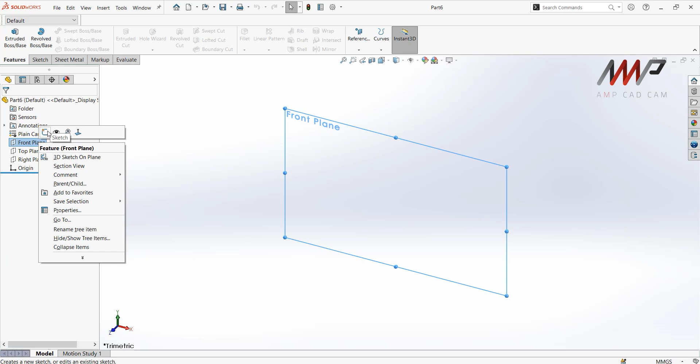Selecting our custom template that we created earlier, sketching on the front plane. I will select a center point arc, the first option from the arc sketch entity. My first click will be on the origin for the center point of this arc. I will click to the left for the first endpoint and to the right over there. And again, a second arc over there.

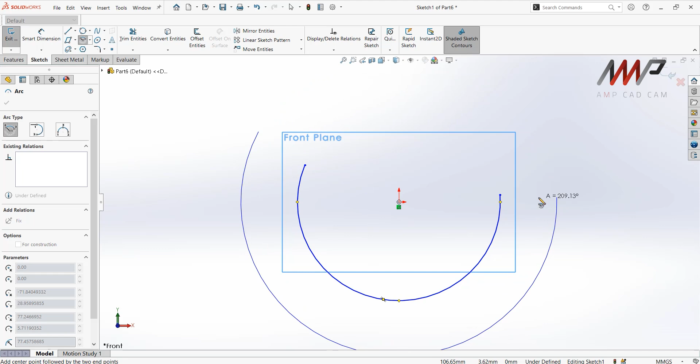Don't worry about where the endpoints are right now, as we add in our dimensions they will pull themselves into the correct position. From here, using right click on my mouse and swiping to the left, selecting my line tool, I will connect this endpoint to a vertical line upwards, horizontal line to the left, making use of these dotted lines to make sure I'm in line with the end point of this arc over here.

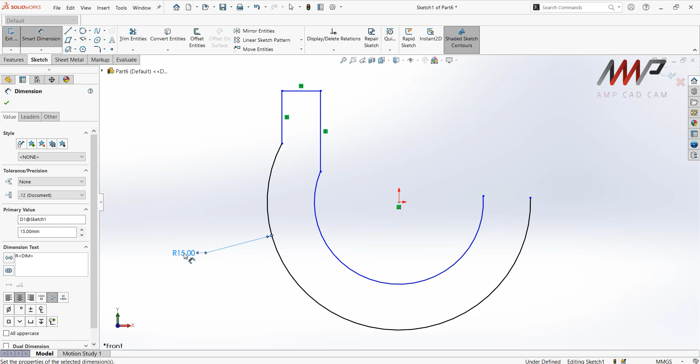So the largest dimension over here is this diameter 30 for the outer arc. Although it's listed as a diameter, in our actual sketch we need to insert it as a radius because of the nature of this arc. Selecting this arc, that radius will then be 15. Remember, your first dimension on your sketch scales the rest of the sketch, which is why I added the largest one first.

Thereafter, I can add this 6 millimeter on that length over there. This was a radius of 8 for a diameter 16.

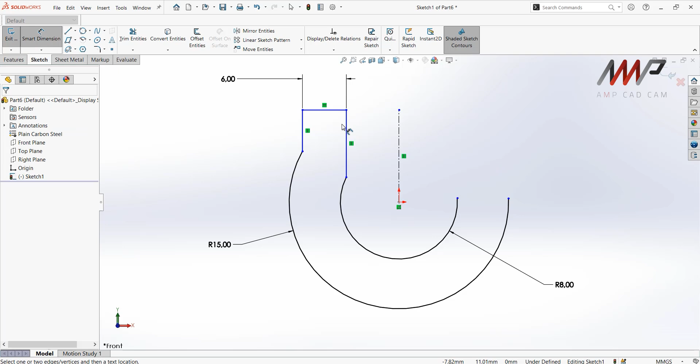From here, I am going to add in a center line. Right-clicking and swiping to the left for my line tool, ticking the box that says for construction because I'd like a center line. Now from the origin, I will draw a vertical line upwards. I would like to dimension between this vertical line over here and the center point, the center line.

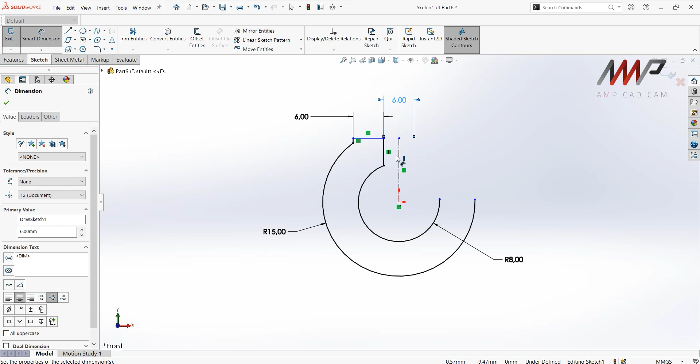You'll see in our instructions there is a diameter 6 gap across the center line over there, so that's what we're doing now. Moving my mouse past the center line so I get a double dimension, that is 6 millimeters there as well. Then the height of this line from the origin is this dimension over here, 12 plus 3, all the way to the top, so that is 15. From there to there is 15.

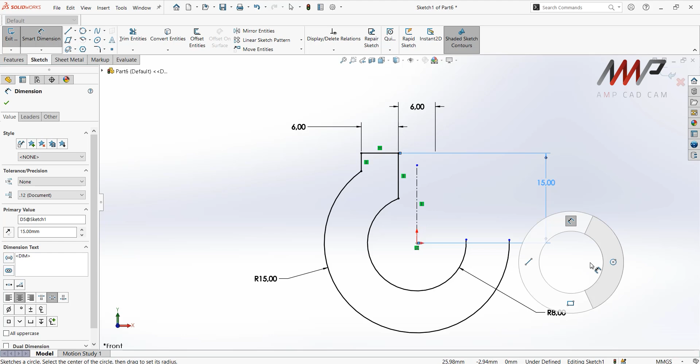Okay, we're almost there. Now I'm going to right click and swipe to the right for my circle tool and insert this over here. That was a diameter of 4 with a height from the origin of 12 and a center distance across the center line of 12, again making use of that center line to give us a double dimension across.

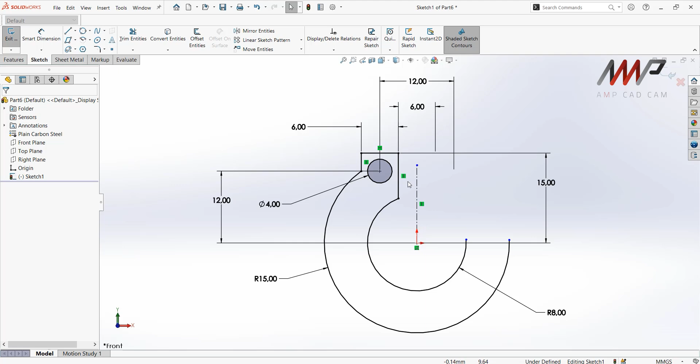Now we can go ahead and select the entities that we want to copy, the circle and these 3 lines, and mirror that across the center line. You can click and control select each of them individually, or left click and swipe towards your left, and you'll see this green box appear. All the entities that are partially or completely within this box will be selected. So I've got the center line, those 3 straight lines and the circle.

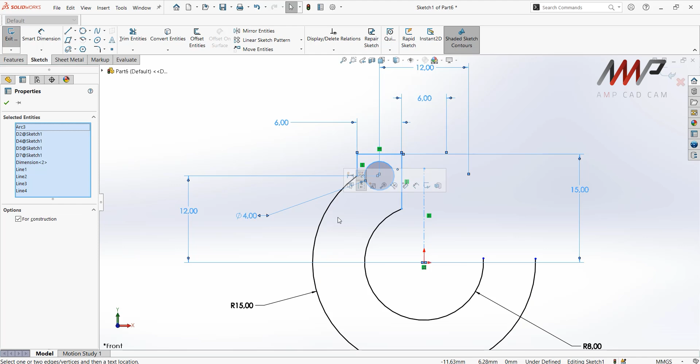I also have this arc over here which I don't want to include. I can simply unselect it by holding control and clicking on the arc to unselect it, so only the blue entities are included. I've included the center line over there, so clicking on mirror entities will automatically produce the result I want, which is the copy of the 3 straight lines and the circle on the other side.

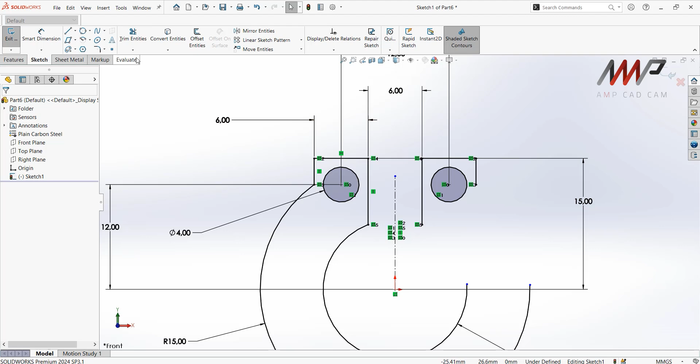From here, to close these arcs over here, I will under trim entities, expand that menu and click on extend entities. Click on one arc to extend it and click on the second arc to extend that too. Now our shape is complete, our sketch is complete, and we can do our boss extrude. Clicking on the features tab, going to extruded boss/base, this was a thickness of 1 millimeter over here.

So let's include that here, 1 millimeter, and that is a blind extrude. We can see the preview and that looks good.

The last thing we need to do is add the fillets. The fillets are radius 1 in 8 corners. So let's go and add those in as well, on the features tab, going to fillet.

We want a radius of 1 millimeter, and we can go and select those edges now. So I'm zooming in slightly so that I can see well enough, and I can select those edges. Even if you can't see the edge directly, you can actually click through a surface and it will highlight orange.

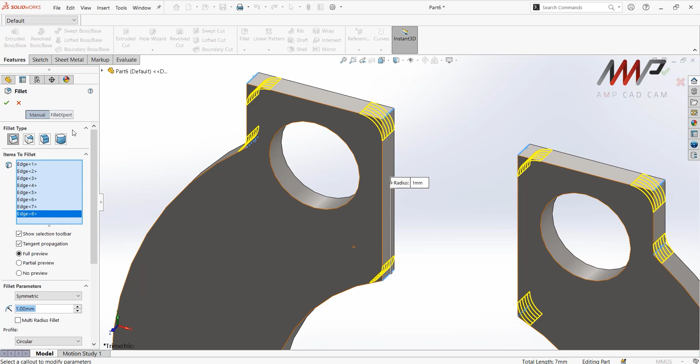So that's 4 so far. That is 5, 6, 7, and 8. And there we have it. I can click OK on that, and the first configuration is done.

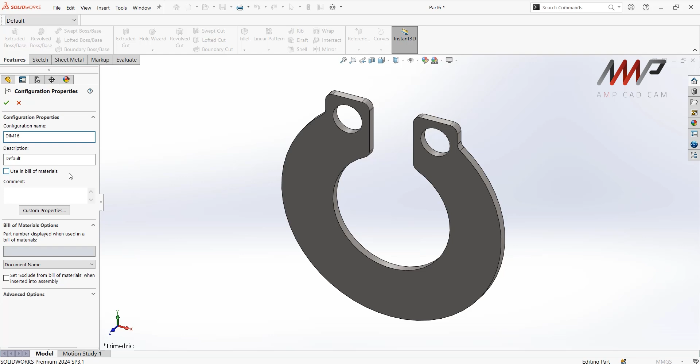Now what I will do is, in the configuration manager, clicking on that default, I can copy and paste to create a new configuration. This one that we have just made, I will rename it. This I will call dim 16 because the inner diameter of this is 16, and the copy that we are going to edit now to make it smaller is going to be dim 8 because the inner diameter is a diameter of 8.

Okay, so popping back to the feature tree, I can see my fillet and everything is over here. I'm actually first going to edit the fillet and change this dimension for this configuration only, and I'd just like to halve this.

So I know that half of 1 is 0.5, but if it was a bit more of a complicated number, I can actually type in this dimension box over here, a slash for divide and a number 2, in other words, divide by 2. When I press enter, it will calculate it for me and include it there.

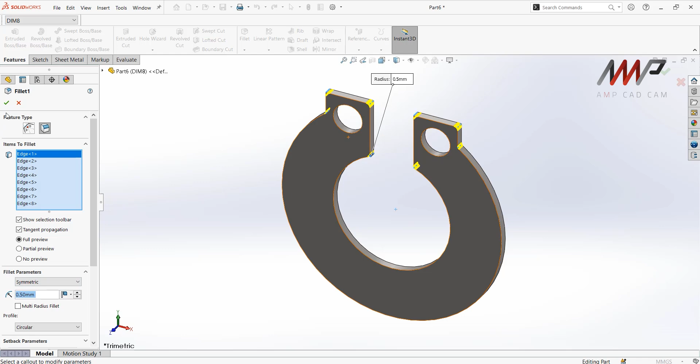Then I can click OK on that and continue to edit the rest of the sketch. So now editing the sketch of that boss extrude, remember we're on the smaller configuration.

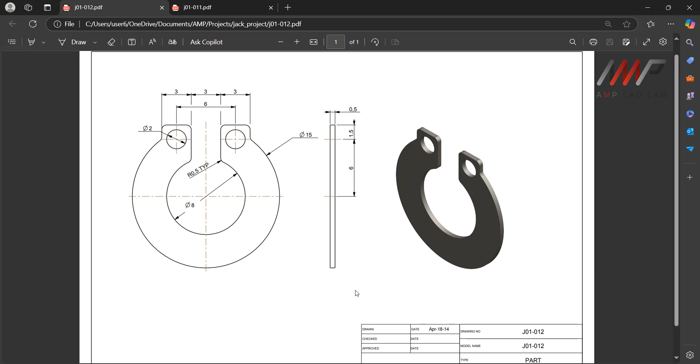So for all of these dimensions, we will do exactly the same thing as what we did for the thickness of the boss extrude. But be careful of the order that you do it in, because sometimes it can actually distort your sketch and it will cause some errors.

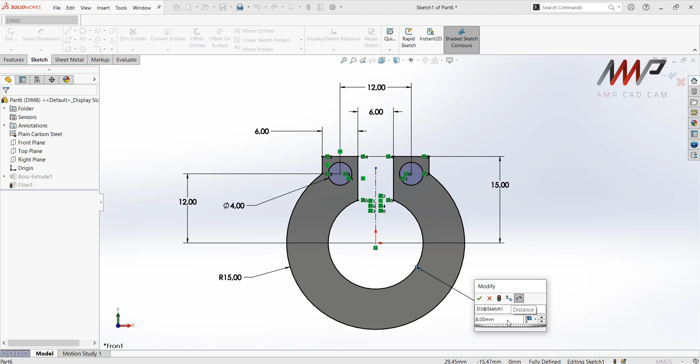So let us start with this inner radius over here. I want to change that to this configuration, divide 2 and enter, and you'll see that inner arc will become a little bit smaller.

Let's do those circles as well. Make sure to select this configuration, divide by 2, and those holes have now become smaller. This gap over here of 6, let's halve that.

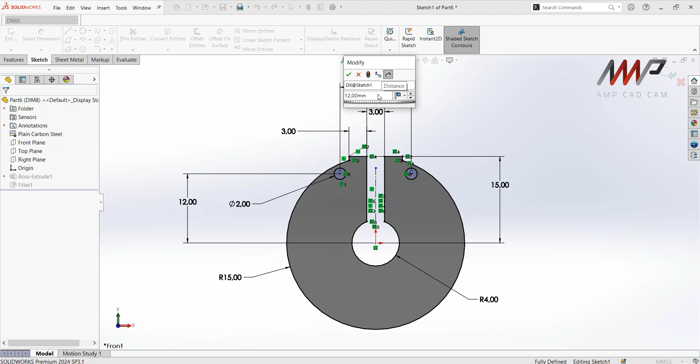Okay, the length of these tabs over here, let's halve that. The center distance over here as well, let's go and halve that. And then the distance from the origin to that center point, divide by 2.

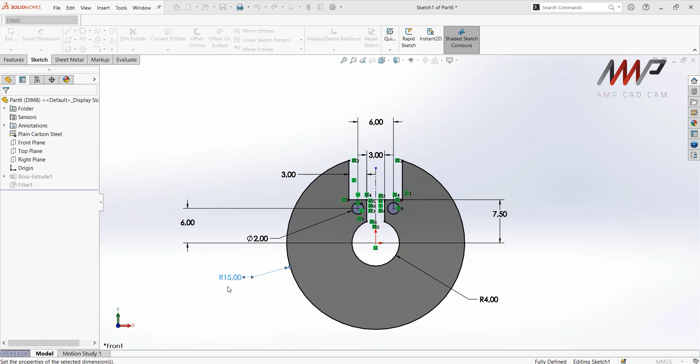And write the height over here of these tabs for this configuration, divide by 2. And lastly, this outer diameter over here, or rather the outer radius, divide by 2. And once you zoom in, you'll see that it looks exactly the same as the previous sketch that we've done, but the scale is smaller.

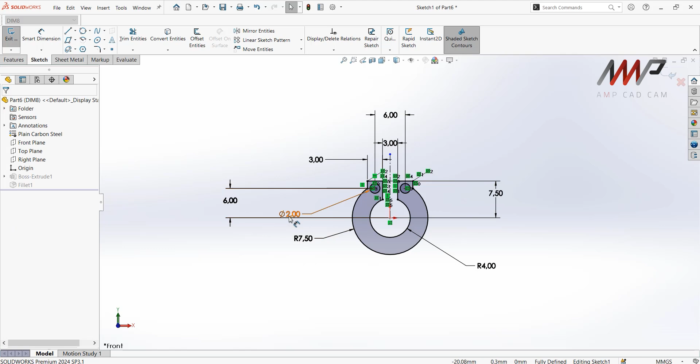The dimensions themselves have moved a bit further out because we've minimized the sketch itself. It's not necessary to move the dimensions unless you want to neaten it up a little bit more. But as long as everything is still visible and you're happy with the sketch, we can then save and exit the sketch. And the last thing to adjust is the thickness.

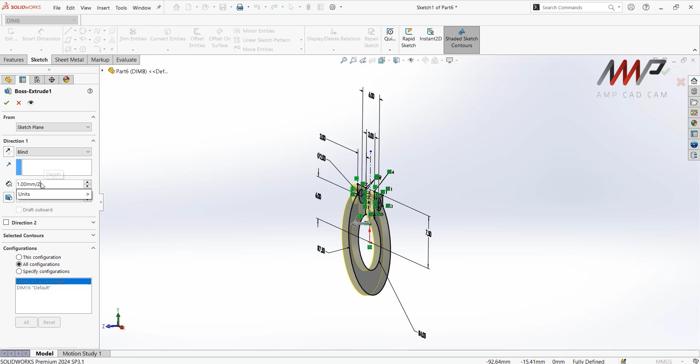The thickness as well has been halved. So editing the feature, we can change that and divide by 2. And there we have it.

So now we have 2 configurations within the same part file, one with an inner diameter of 16 and one with an inner diameter of 8. So inserting these different configurations into the assembly will be easy because we can actually select the configurations on insertion.

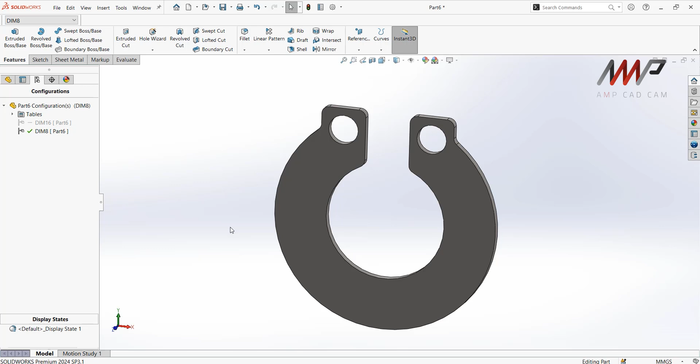And that brings us to the end of this video, so stay tuned to see future videos of all of the other parts that are involved within the assembly and how to create them as well.